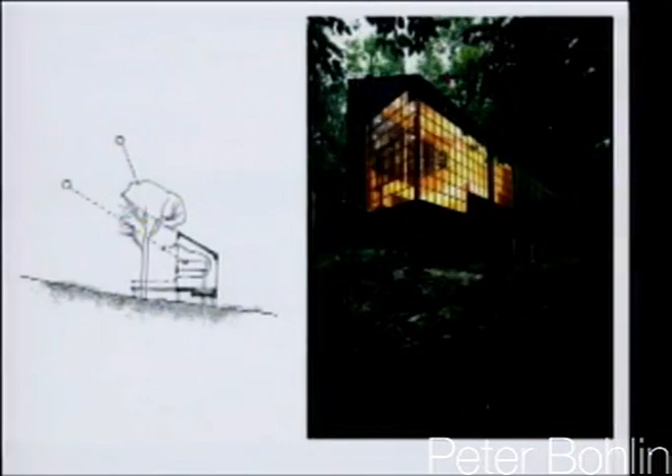It's still iconic in a funny way. I mean, it's funny because then you wonder, well, maybe I peaked. Oh, maybe so. You'd wish to do everything with grace, right? I'm not sure it works that way.

But it really also, I think, I don't mean to overstate this, but it was getting at issues like sun and ventilation and all of that as well. And having a very graceful touch on the land. This sort of, the light in here sort of washes out under the building, but the land rises up right through under that building. So it has a graceful touch.

When James Timberlake wrote the thing or presented to the board at the AIA, the final presentation, which we're not allowed to do, he did an extraordinarily good job. He pointed out that if you took away the building, it has a very gentle touch on the land. That's a monster deal, still.

So that was early 70s. Paul Goldberger wrote about that. I don't know if you spotted the fact that in the New Yorker that's out today or yesterday, Goldberger wrote a little thing in there again.

And so, you know, one of my other heroes was Joe Esherick. I didn't know him then. We later became friends before he died. But I thought he did a string of buildings at one point in his career particularly. He was always socially minded, which was a big deal. And I think it had particularly to do with Northern California, you know, that set of interests in the way you do things for people.

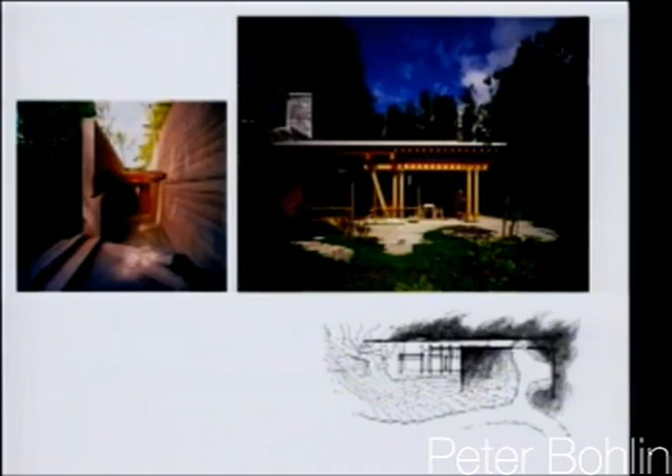This house, the guest house, we did two things in the beginning, the garage and the guest house. The guest house is all about getting from here to there. Roger Clark, in his book on precedents, points out in diagrams, I don't know if you ever noted that there's similarity between that and my mom and dad's house. Although the materials and the structuring is radically different, the spatial qualities are somewhat similar in intention.

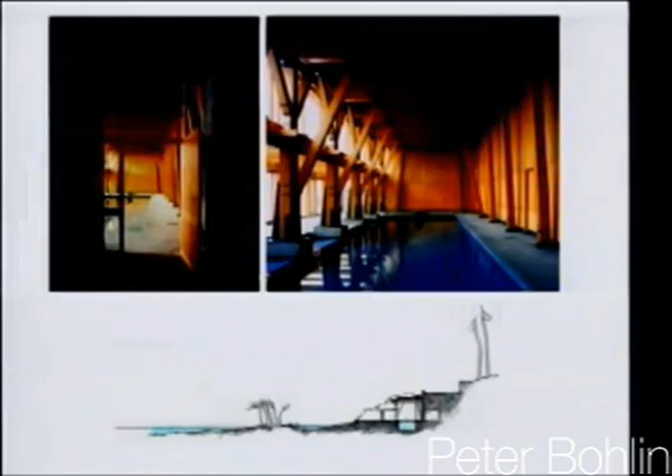Many of these were underground. That building had earth on the roof—it was a green roof. The pool is another one.

But you see, Bill is a terrible driver. We were worried about Bill coming down the driveway, making the turn, and flying right over the top of the pool roof. So you never go over the pool exactly—you can see the section. But we could imagine this; I mean, he'd do it.

So we made a pile of logs there, loose logs, because in the Northwest you see those piles of logs everywhere—they're floating around. Well, until the owl came along. With the owl issue, I don't think there are many floating now.

So that back corner has more earth in the logs, and therefore the columns you see in the corner are shifting in onto those loads. What a pleasure to be able to see that connection and not have to falsify it. It was good, because that space is nicer for those timbers starting to twist in. You're not sure why—you'd probably never figure it out—but it's because the loads got much heavier at that point on the roof.

And you do have this space looking out to the lake. And here you're looking back at that space.

Could you go back on that one, Tom? I just want to point out Lewerentz. Do you spot Lewerentz here? You notice that the door and the mullions do not hit the stone—if those wood mullions hit the stone, they would denigrate it. I mean, it's not a nice thing to do.

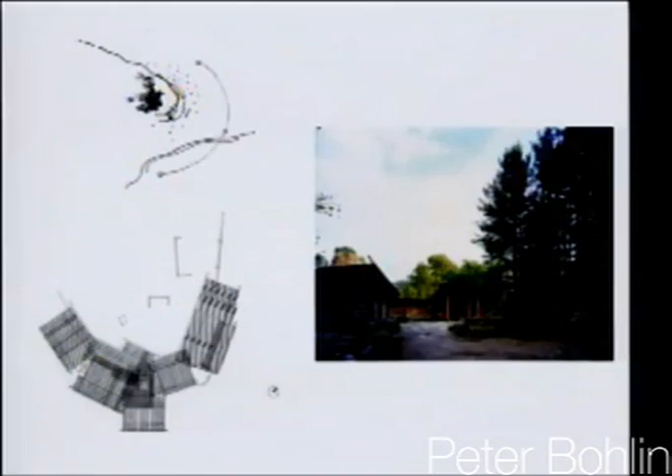The framing—you notice how the rhythms dance a bit. There are splices, there are double members where we were picking up horizontal stresses back to particular columns and that. So in a way it's like a score—like a music score, I think, but of course I'm not musical, so I can say that.

It tells you about itself. Now, you may not be interested in that, but the patterns are much more—as a visitor, you guys would be interested, but many people would not, most would not, or would not notice. But the richness is there because there's a connection between how it shifts and dances and what it does and what it is. Again, it's that interest that I pointed out before.

Next. Yep, there you can see a little bit of it. You see there's a double member all of a sudden? Well, that's because of that column up on the right that's leaning in and picking up some sideways structural forces. So that's a worthy thing, right? And yet those things gave this building much more richness than if we had figured out how to bury some steel and do this and do that and make it all disappear.

And yet you come through that door and that is the view. So you find you're in the treetops and you're hearing a stream at the bottom. I don't know if in that plan sketch you spotted the stream and the sun on that side. So you're looking at a very bright forest. You're hearing the stream. You had not been aware of those till you got to that door and entered the vestibule and reached the stair leading down to this space.

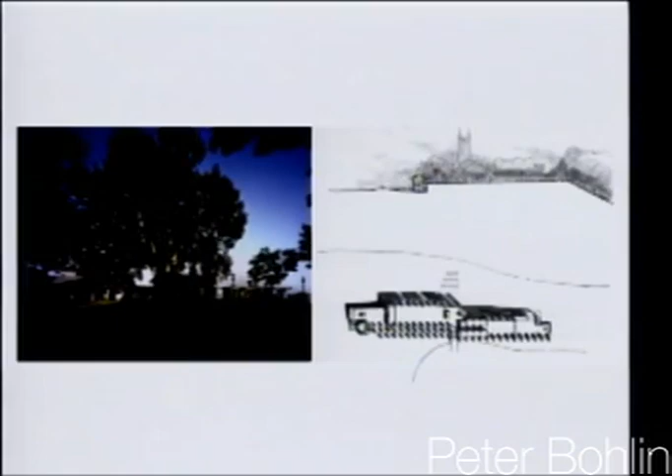And then we structured it. And you can just imagine what was in my mind about older buildings and some one or two modernists, we won't name who this time, to begin to structure that carefully. And you notice the detailing. Weren't worried about using these—sort of looking at the Gothic detailing and then shifting to modernism, but beginning to fiddle with the edges of those stone piers.

I want to leap now to Seattle and the City Hall. It's a place for people. It's a very steep site. The sun shifts from east to west as it goes down over the Sound and the Olympic Mountains in the distance, and therefore the space is animated by its light.

We had an extraordinary landscape architect that we made sure got hired by the city, Kathryn Gustafson. She said we had 65 feet just on that part of the site, and you don't want stairs steeper than Versailles. Well, guess what? The stairs run into the building. They have to go inside, running halfway through City Hall to make it work. That was an extraordinary opportunity. As soon as she said that, I thought about it for 2 minutes and said, okay, that's great.

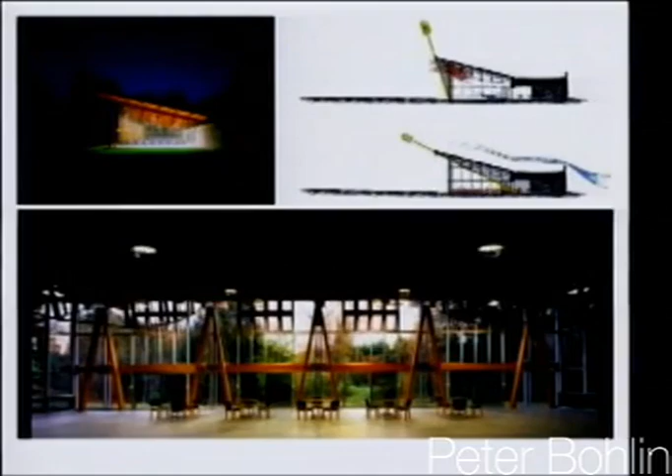Next, you enter this great pavilion that faces the sun, that shields from the winter winds, catches the other breezes, and is designed to cut out the summer sun and bring the winter sun all the way back through the space and heat up that floor.

The children operate it, much like Shelly Ridge and what Frank and I did there. And that is a ventilating shed. It's a great pleasure, and it's done for an extraordinarily tight budget and very satisfying - and of course, a low fee.

I thought, while we're chatting mostly about things I've been particularly involved with, it's really worth seeing Laurie Olin and Bernie's master plan for the Bell. You know how the Bell building is getting from here to there, to the point where it twists and looks right where the Bell came from.

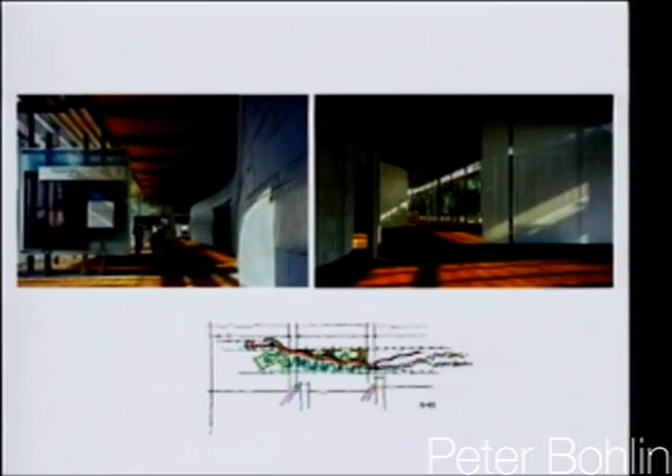Through that - and I love this, it's one of my favorite sketches of Bernie's diagrams - people can choose to move quickly or they can meander, and this is where they end up. So it's again that business of thinking about people and how they move and how they react.

Now, am I loud enough now? I may have started to taper down a little.

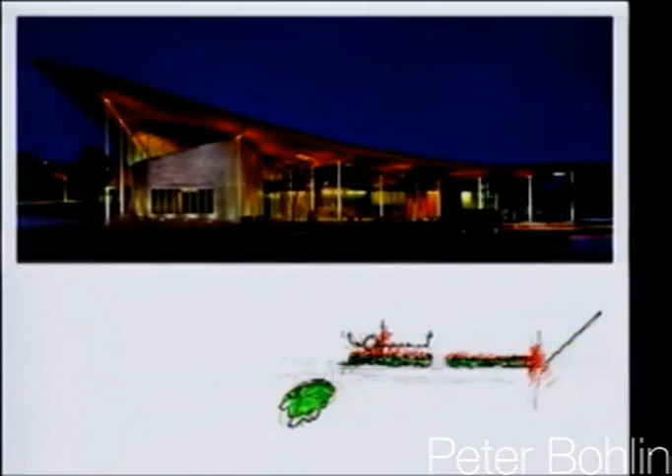And we're doing the Ballard in Seattle. Here we're making a great, wonderful porch for the community. It's a very community-minded place, but in the winter it gets a little wet and damp there, so it's great to have that shelter. It's only a block from the center of the town of Ballard, part of Seattle, and it's the busiest branch library in Seattle.

It has maritime roots and Scandinavian roots. They were Swedes and Norwegians originally in that part of town, and they were sailors - and of course now we have much broader maritime activity. But you can see how we were thinking about that when we made these little bars in the building that look a bit like containers. And you can see how we put that building together under a green roof. At the time, it may have been the largest green roof in the Northwest - not anymore, but it was then.

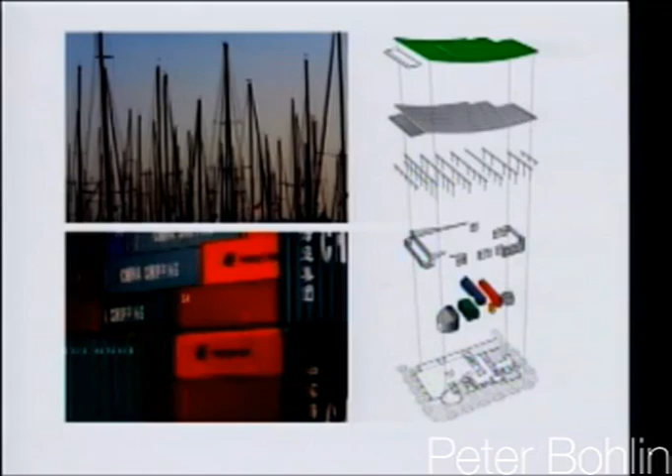The multi-purpose room is just where it should be. If you get it positioned right, you can get in from the outside and use it at night. And if you do the baths right, they can still be in use while keeping the rest of the library shut down. So that's how you make it really work. And it's a daylighting issue.

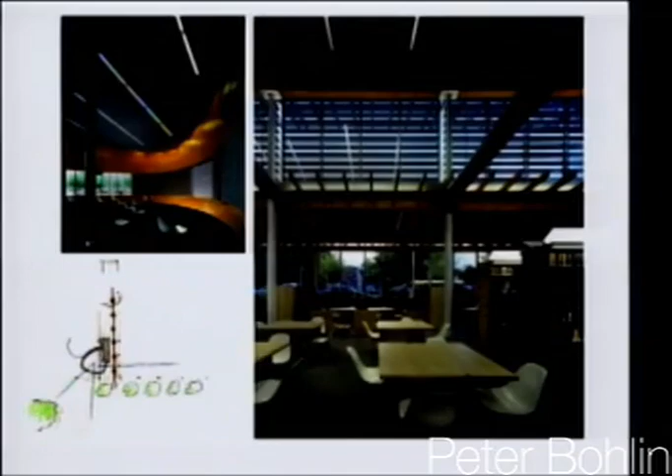In the Northwest, even when it's cloudy, it's misty cloudy mostly, and it's still fairly bright and can be glary. So if you have large glass areas, you want to begin to mute the brightness, which we've done here, because that's looking to the north.

Our partner, Robert Miller, designed these tables - not the Eames chairs, but the tables - and they're made without connections, out of pieces of plywood, just pushed together with a rubber mallet. So Scandinavian library people have come over to look at them, which is very nice from our point of view.

And the roof - Robert also designed this terrific periscope. See these slots between the wood that go all the way around that element. No sign, but the kids find this, and they look through, and they're looking out across the roof. Because there are no books about this that we know of, Robert laid it out on the floor of the office, and we lay down on the floor and looked through it until it was just right.

Almost didn't put this in, then decided to do it quickly. This business of doing modest housing is a very large interest, I'm sure, on most of our parts. Here in Seattle, we've done 3 units that are up to within an inch of where they could be on setbacks and on height, including saddlebags for windows.

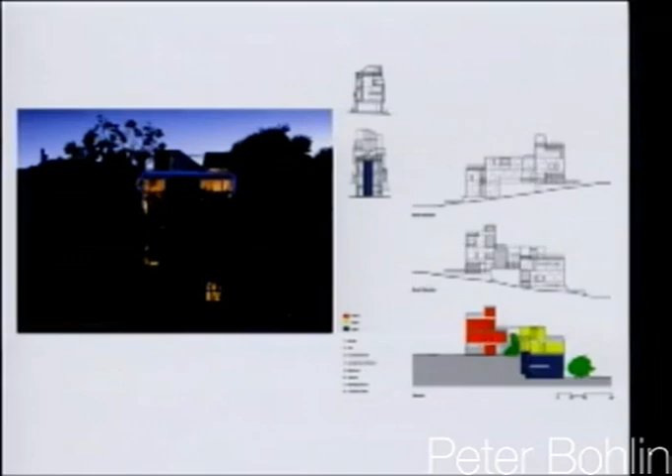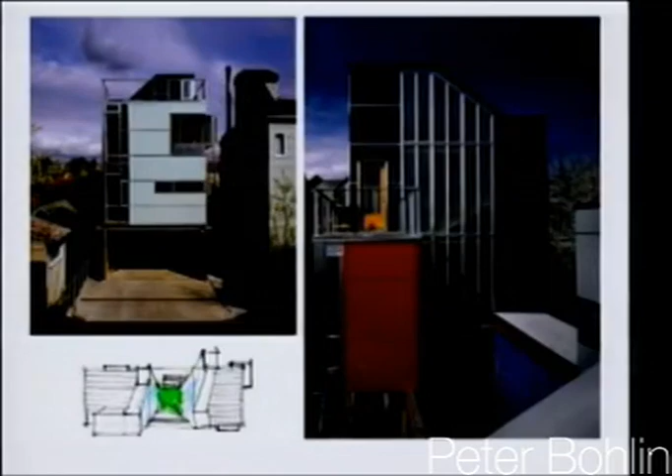You see that little bay up at the top there to the right? That's a bay window, so it can be bumped out. There's a little court in the middle, and we've got either 3 units or 2 units, depending on if you open a door or close the door.

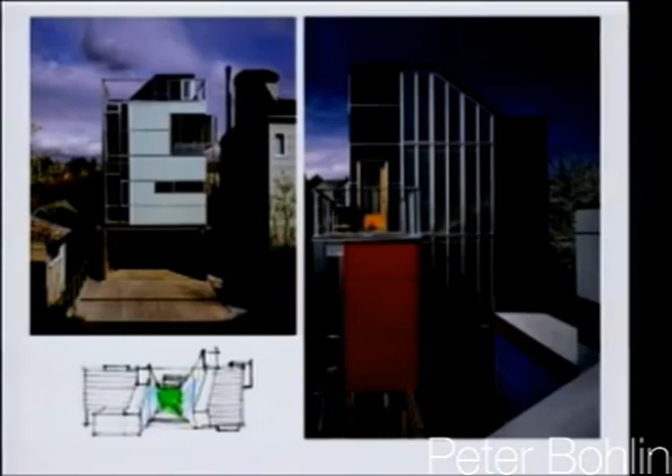I would love to do more of this. It's hard to make the numbers work again, but if we can do enough things that are making money, we certainly intend to do more thoughtful infill housing of this sort. At this point, we're not seeing this so much in the east, but certainly in the northwest we're seeing this opportunity.

Furniture, simple, again, we designed. But notice the window mullions are extremely simple. All we've done is clip the metal system to the outside of the studs. So you read the body of the building, and where you have a window wall, it's extremely simple and economical.

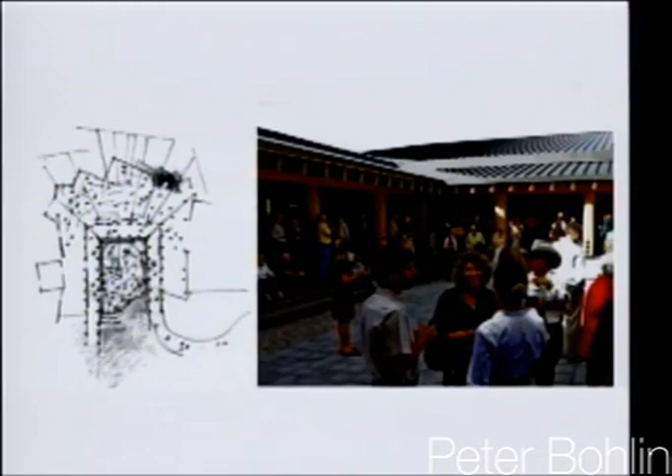Next - from that you enter this space, and it tilts up to the mountains. It has this extraordinarily grand fireplace that's concrete and stone. We worried about it - first it was stone, and I was worried about not being modernist enough, and then there was a budget rumble.

So we made it concrete, which is by far happier, and some stone, which is really nice. And then we got a donor for it all - I actually did the sale on the donor, and he didn't realize it was no longer stone. So later he rumbled a little, but then he was happy after it got built.

And these are great timbers - all Canadian, but they're all sustainably grown and forested.

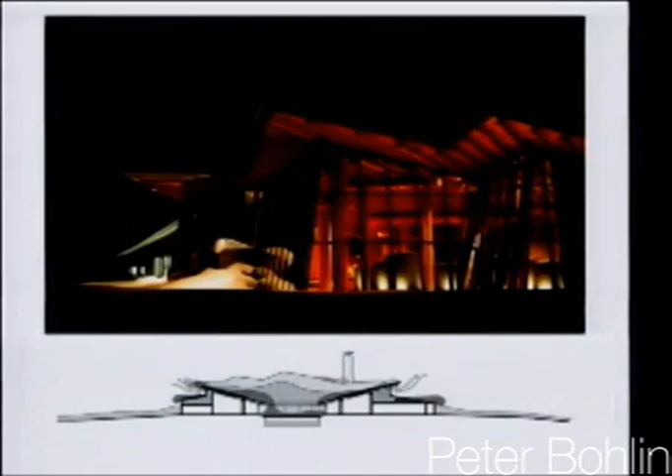The windows tilt slightly to cut out reflections and also to aim more directly right at the mountains. And you see how we looked at the snow here in the court. We looked at that with an acquaintance of Bernie's and mine from San Francisco, who's sort of an alpine expert - I think he does mostly forensic stuff now, when architects get sued, this sort of thing.

But we found that if you looked hard at the snow patterns and the wind patterns, the code was wrong. You still have to meet the code, because a code is a code. But it would not have been sufficient for those very large loads of snow that would develop on the roof because of the winds and so on. So we designed for his calculations as an overlay to the code. You see how that makes these tunnels around the court in the winter, and the snow sits in that recessed court and it melts.

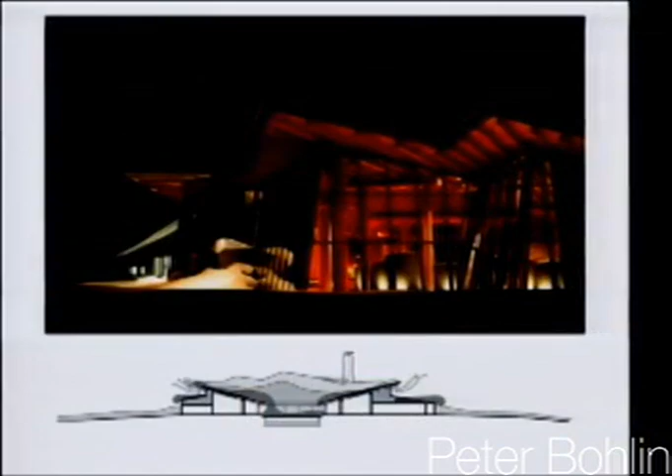And we put snow melt under there, but it's geothermal.

So this is modernism, and it's rustic, sort of, right? But it has to do with getting from here to there and dealing with people's emotions. I believe most modernism has not done that as effectively as it might - that is my own personal view.

Our clients are here for this one, a Philadelphia client, but this house is on the Juan de Fuca Strait. That view - you see the sea down here - is that 150 feet high? Yeah, and it's a cliff, so you don't want to get too close because it may slough off. You reminded me I was too close at one point.

I don't remember that. But it's a simple building, it's not a big building, and it's lovely - I'm tickled about it.

You see we're using recycled barn material, and it's an agrarian kind of scheme. It's got a cistern right where the V is in the roof. You can see the sequence moving this way and all of a sudden getting that view out to sea - that's looking right out toward China. Well, actually, I think it looks a little toward Vancouver Island, but it's so far away, you can imagine it's China.

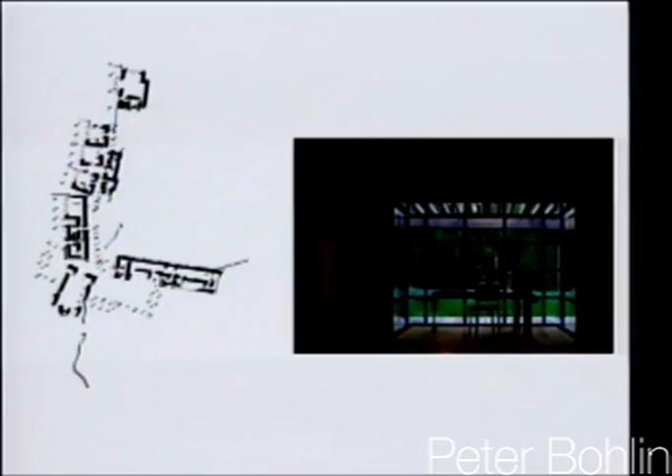And so it's modernism, but isn't quite the normal way of doing it. And yet, I think it has to do with how people perceive things, right? And how they move through them, how they discover them, how they remember other places where they've been, how they're comforted, all of that.

And that's a Chareau desk from the 20s. Just great. And that is an astronaut's underwear. Only one we know out of captivity. No, it has all the little tubes, so for heating and cooling. You can't quite see it in that photo, but man, it's wonderful.

You know if you were going to screw up. But you notice this hardware, we designed that. And it's biomorphic. Grip it. And there are all those sorts. So you notice these props for the great oaks.

So what a pleasure to have this to do. That book, this house is in that book, but there will be a book on this house because the client says, well, we're going to do a book. So the question is how to do the book. And I think we'll keep our hand on it, but not.

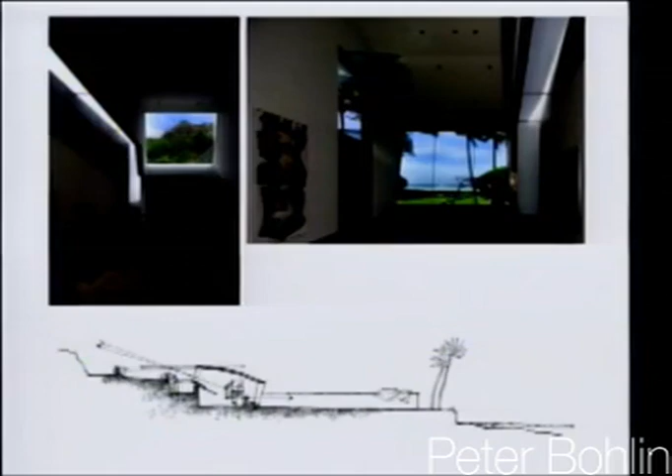So it all has to do, again, with point of view—how you get to that point, how you're in the potent position, and then how you deal with it. Next. This is how we dealt with that view.

Next. So this is now coming closer to home, and I think it's the last project. This is Combs Point on Seneca Lake, for a wonderful client. It's in the newest Metropolis—I don't know that it's out yet, I think it's out, but I'm not sure it's arrived yet in the mail.

But I don't think it has a photo of that waterfall, that's at the head of the ravine. The house is in the ravine and extends out onto the delta. That ravine, when it's made, would form a delta in the lake.

Next. So here you can see in this little sketch how the house's potent position, as far as the main living space goes, is just beyond that edge, where you can also see sideways along the edge of the lake.

This lake is very deep, I think it's like 1,000 feet. It's a very deep lake, a big glacial trough. But there's the waterfall.

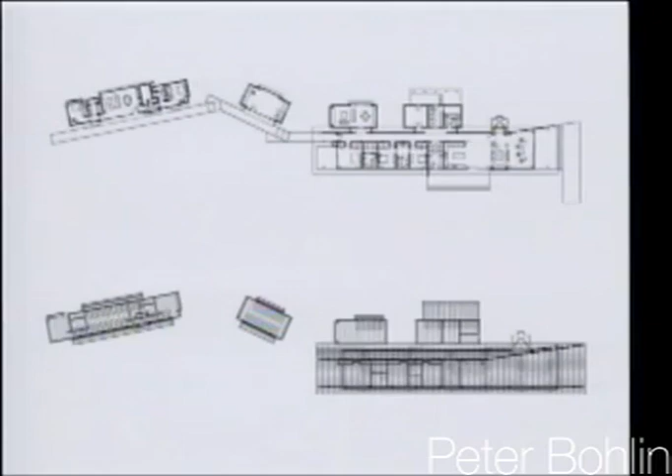Next. You can see that roof tilting up there and there.

Here's that steel beam that's coming down that hall, and see how it twists right here.

And of course, another fireplace. My mother, when we did the first house for them, we made a box to scale up the fireplace. We made a room, and my mom called it the hot box. But we've been doing hot boxes of one sort or another all through our careers, because it gives you a chance to scale up a fireplace, unless you really only have room for a little tiny thing.

But to make places that are counterpoint to a space like this is just terrific. And you know where those shapes came from? I think they came from my love of Lou, but he never did one like that exactly.

But you notice here, you're right to this point at the dining table, the kitchen's right here, and there you're looking sideways down the lake, which to me is almost a better view than straight out.

And there you can see a study of that little view position.

In Metropolis, Alexandra Lange, I think she calls this a sort of porch-like place, and the whole living room is kind of like a porched place. And our client, Wendell, and his son need a great deal of light, more than most people, physically. And this certainly provides that. It was very much part of the original brief that we do that.